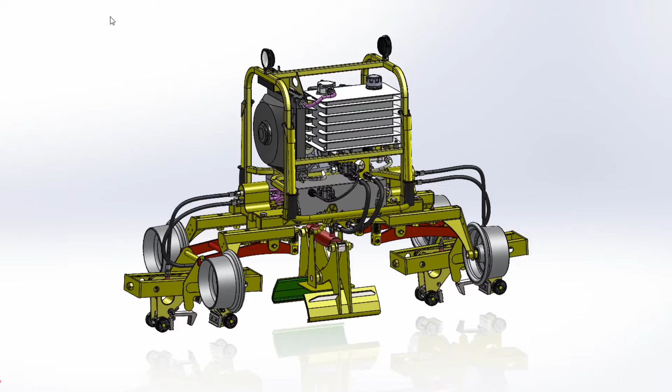SolidWorks Sheet Metal and Structure Systems have new enhancements in 2023 that enable smoother design-to-manufacturing workflows and speed up tedious tasks. This track-setting machine has a hydraulic guard that needs to be extended to further protect these couplings from heavy equipment and falling debris during operation.

Opening the sheet metal part, we can easily extend the front of the part 2 inches to cover the coupling. But notice when making this change, a warning popped up in the tree. New for SolidWorks Sheet Metal 2023, sheet metal specific sensors can be created to dynamically warn you if the flat pattern of the sheet metal part exceeds width, length, area, or bounding box area blank values.

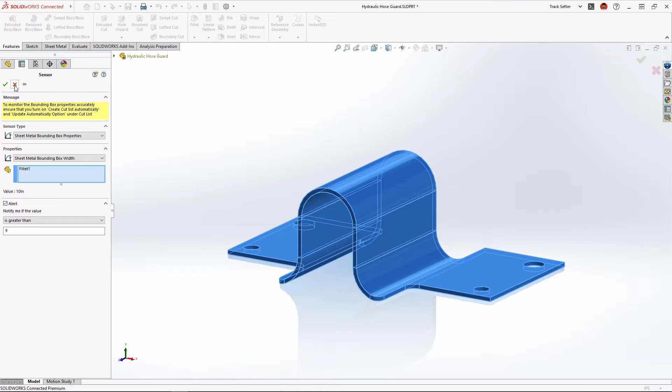This new feature saves redesign time and catches costly mistakes, so your sheet metal parts will sail through manufacturing. By reducing the outer dimension of this part, the warning goes away. When this part was originally created, a sketch was used to create the initial base flange where all bends were dimensioned equal.

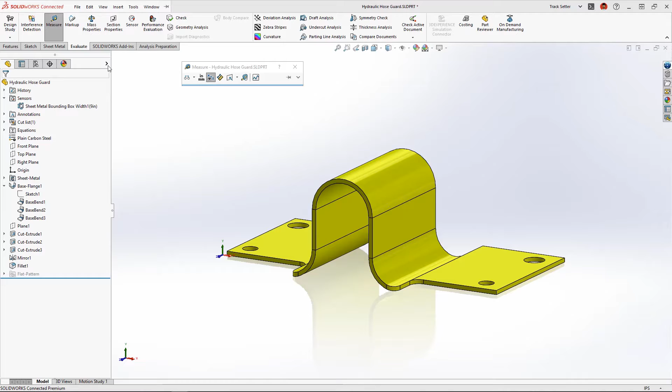But when accounting for material thickness, it results in different radii for the inside and outside corners, and that's a problem for manufacturing since this requires additional machine setup. Now, in SolidWorks 2023, we can choose the new symmetrical option, which will ensure an identical inside and outside resultant bend radius.

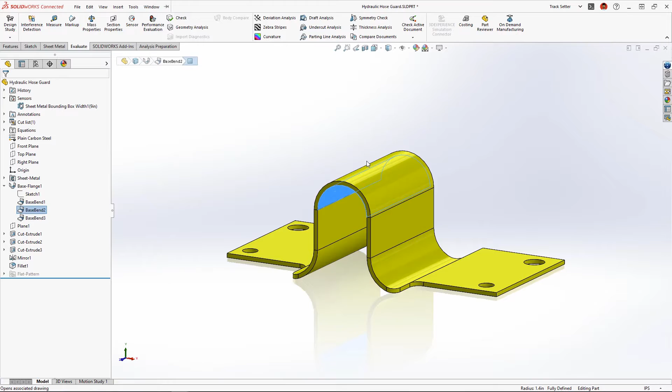We used a gauge table for this sheet metal part, and now in the drawing, the gauge value can be added directly to the cut list properties, preventing the need to create any global variables or equations. As we're preparing to ship the machine, we'll need to build a sturdy, reusable shipping crate to prevent damage while transporting from job site to job site.

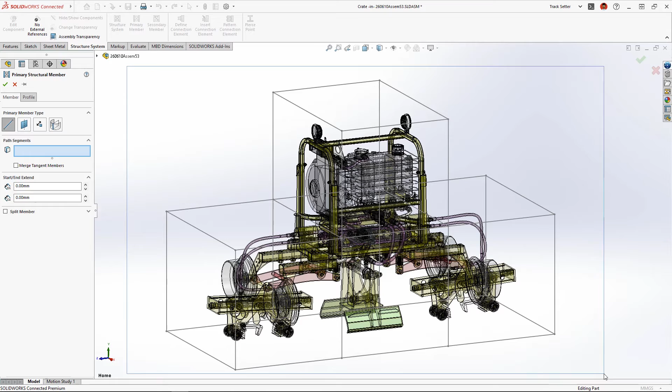SolidWorks Structure Systems was used to build this steel crate from a combination of 3D sketches for primary members and reference planes for secondary members. By default, all of these corners are mitered, which is great for some applications. But for this crate, we'll need to change the corner treatments to make it easier to build.

New in SolidWorks 2023 Structure Systems, we can now automatically group similar corners to apply the same corner treatment. These purple arrows identify which corners will belong to the group. Using the new Zoom to Selection command, we can verify that the trim order is exactly what we want.

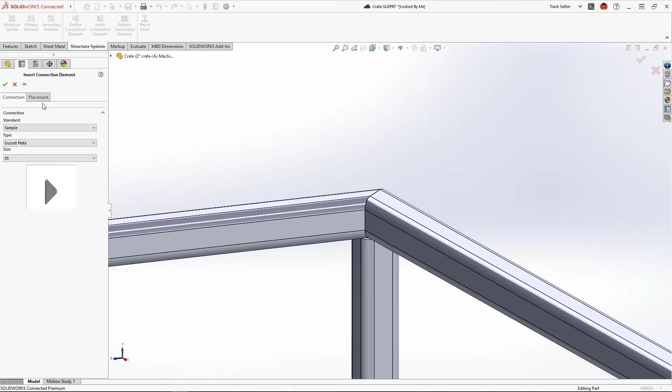To strengthen the corners, we'll add a connection element like this gusset. New in 2023, these can be patterned to similar corners. Again, the purple arrows identify where the patterned gussets will go, automating the structural design process and saving time.

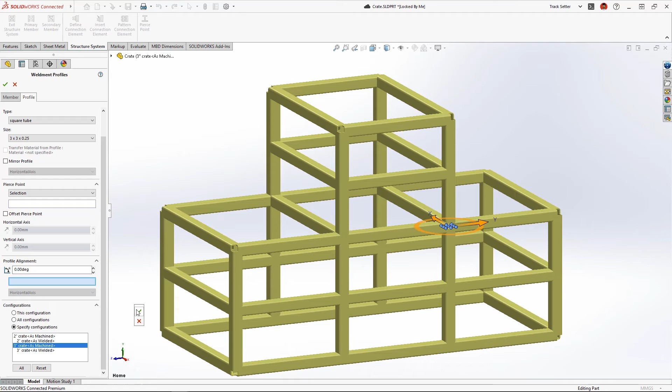We may want to build a more durable crate with larger square tube stock. New in Structure Systems 2023, we can now change the weldment profile for a select set of members and save that to a unique configuration.

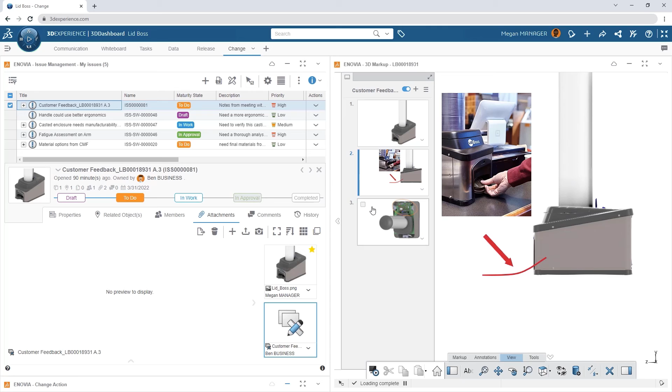SolidWorks Sheet Metal and Structure Systems in 2023 accelerates your design to manufacturing workflow and adds new features that every shop floor operator will enjoy. And when you connect your designs to the 3DEXPERIENCE platform, sharing your work with other users or across teams is easier than ever.